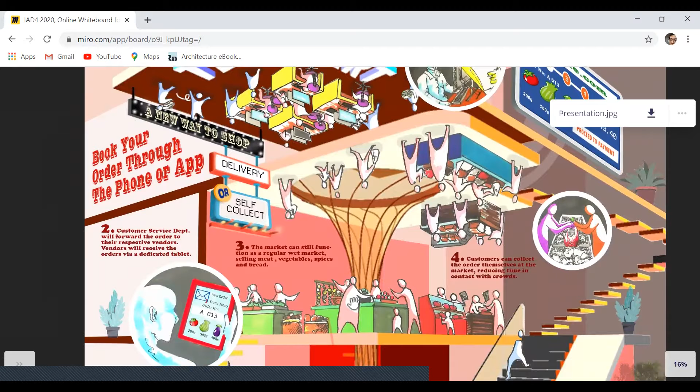This is where the Telemart comes in. The traditional wet market still operates as usual on the ground floor, but on the first floor, we have a dedicated administration office, which receives orders through telephone and online from customers, and those orders are vetted through the traditional wet market from a dedicated device.

The orders are packaged and processed and sent to the delivery area where they are quality checked before being sent to customers. Customers who receive these orders by delivery can completely avoid crowds but are unable to choose their goods.

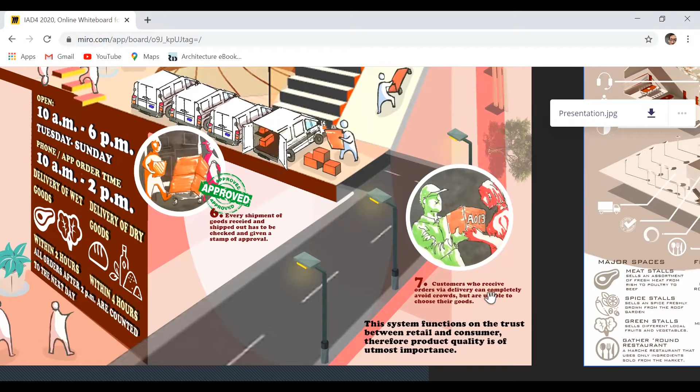This system functions based on the trust between retail and consumer, and therefore the quality of the product based on trust is of utmost importance, which I highly prioritize during the design process of the Conduit. So let's go to the Conduit.

Let's start with Rekascape Cyberjaya. It has a relatively high temperature, and the original design is relatively geometric, made of mostly steel, with speed of construction as a priority.

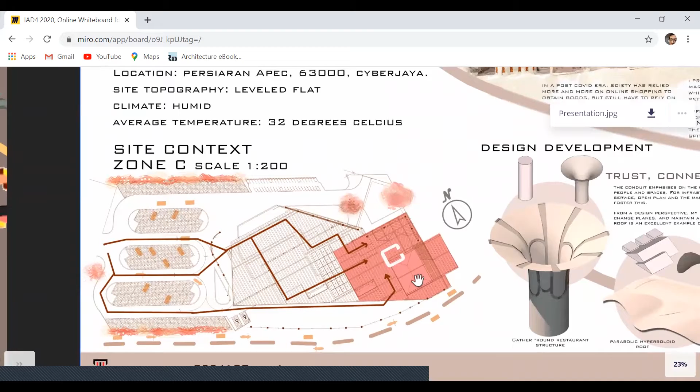I chose Zone C because I needed the parking area to facilitate my delivery service.

Let's talk about design development for a bit. I chose trust, connectivity, and versatility as my three design priorities. Therefore we have fluid shapes, open plans, relatively few walls, and relatively few doors.

Let's talk about spatial programming. We have the fruits and vegetables section, and the quality control office here, connected directly to the parking area.

Because a lot of technology is used here, since all the orders are vetted through a dedicated device, we need a directory and a tech support counter here.

Connecting all of it is a marché restaurant, which only uses ingredients sold at the stalls on the Conduit. Customers come to the Conduit, buy food at the marché restaurant, and from there start building trust and reliability based on the goods sold, and therefore build confidence and start using the online delivery service.

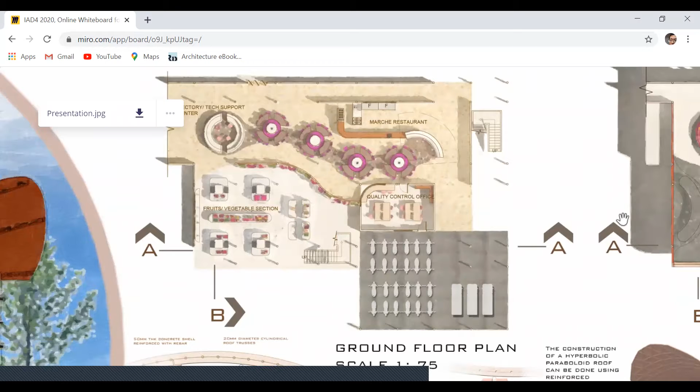So this is the ground floor. On the first floor, we have the spice stalls, the meat stalls, and the administration office, the place where orders are received via phone calls or website.

I think this is a good chance to talk about the hyperbolic paraboloid roof. I took the huge liberty to directly change the roof, and the reason for that is because I needed a design that reflects the values trying to be promoted by the Conduit. The original design of the roof is relatively geometric and rigid, and split up into multiple sections.

I thought it didn't really reflect what I was trying to do with the Conduit. So I chose a hyperbolic paraboloid structure, which is basically a potato chip shape. There's a reason why potato chips use this structure: it's a doubly ruled surface.

And every point found on this plane is connected with two different lines rotated at different angles. And so what that means is that despite this being a curved structure, it can be constructed using only straight lines, meaning engineering is quite feasible.

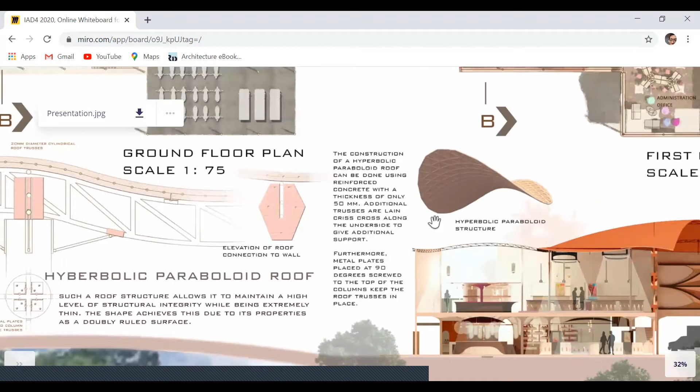Also, a main advantage of using this type of curved structure is that it has a high structural integrity despite it being relatively thin. So for 50 millimeters worth of concrete shell, reinforced with rebar and iron trusses running crisscross along the underside, should support this structure. And as you can see, the roof runs along the entire structure. It's one solid piece.

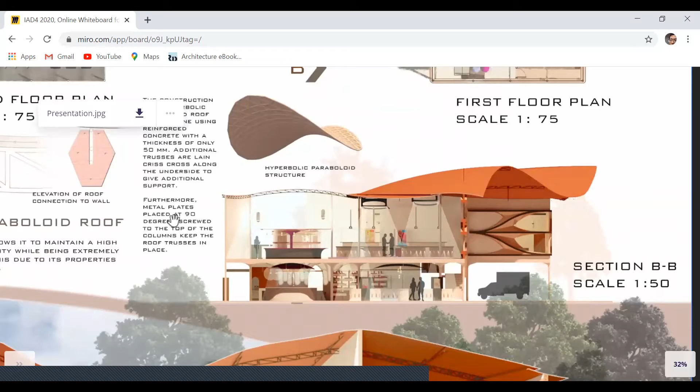So this is my section. This here is the main market area. This is the administration office. And this here is the quality control and delivery service.

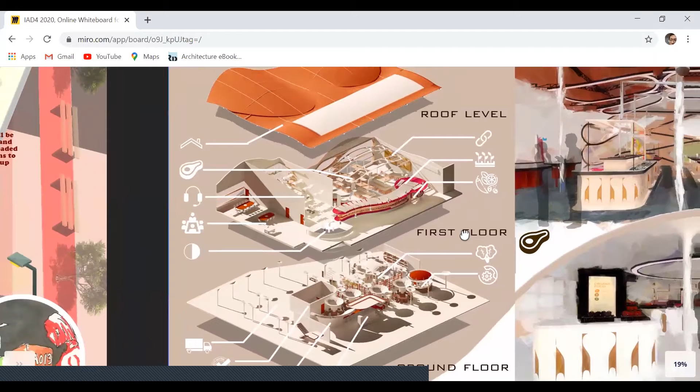This is my exploded axonometric, where you can see how everything fits together. As you can see, there are relatively few walls, relatively few doors. You can easily walk between spaces.

This is the meat stalls on the first floor. As you can see here, there is air ventilation to prevent odor.

And here's the spice stall. And also on the roof of the spice stall, it also doubles as a hydroponic garden. So all of the spices sold in the spice stall are grown on the roof here. And that's why there's a skylight.

So this is the vegetable stalls and the marché restaurant on the ground floor.

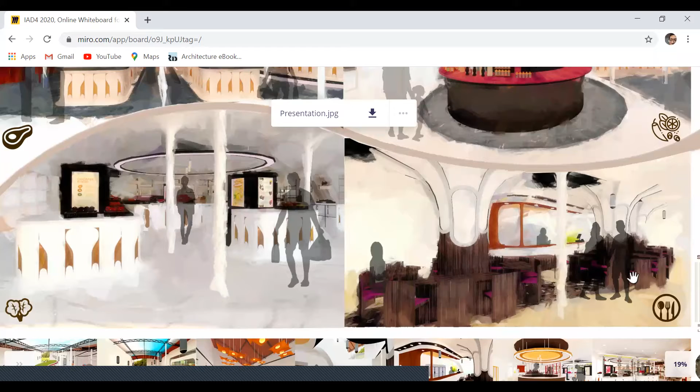So lastly, let's talk about the modular stall. For the modular stall, I emphasize versatility. Every component of the modular stall can be taken apart and put back in without changing the main stall. So for example, if you damage the main wall panel, you can take it away and replace it with a new one without having to take away the entire stall.

So the weakness of this stall is that it doesn't have any wheels. So to counteract that, there are grooves on the side to make hand carrying all of the components very easy.

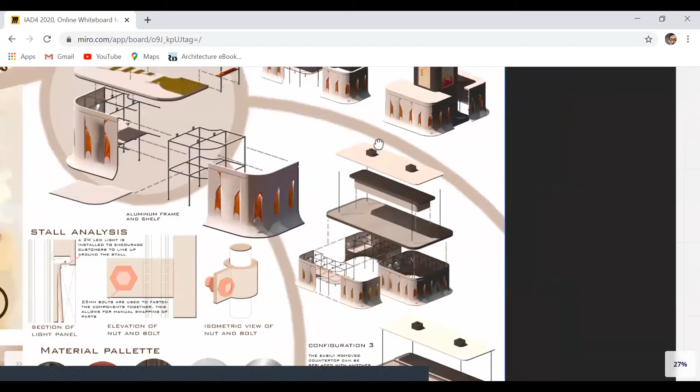And because of the high versatility, there are many different configurations. For example, here, this is the configuration that I use for the vegetable and fruit stalls, which is two stalls sandwiching an advertising panel. And this here is the configuration that I use for the meat stalls, which is basically four stalls with a custom countertop and a custom roof.

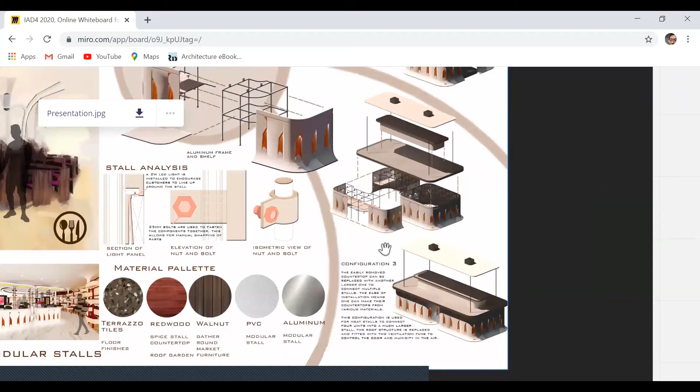So what I'm trying to say here is that due to this high level of versatility, you can easily handmade your own tabletops and countertops to arrange this modular stall in any way or any configuration that you like, which I think is the biggest strength of this type of modular stall.

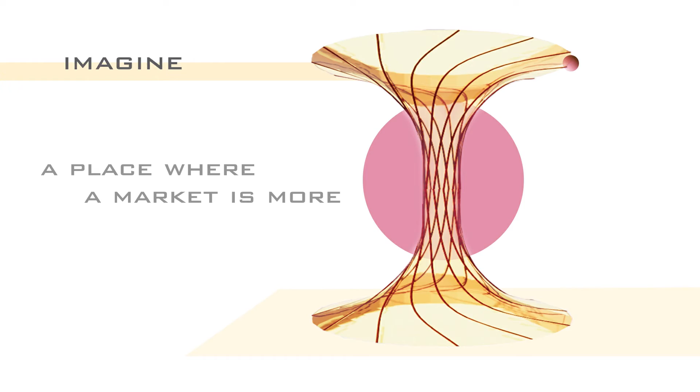Imagine a place where a market is more than a market. Where connectivity, trust, and versatility are design priorities. And to connect more than just spaces.

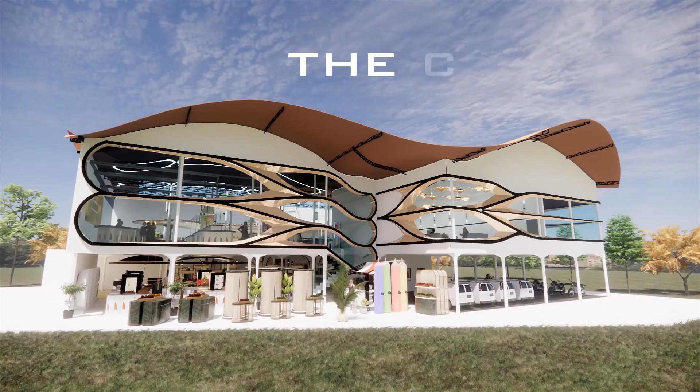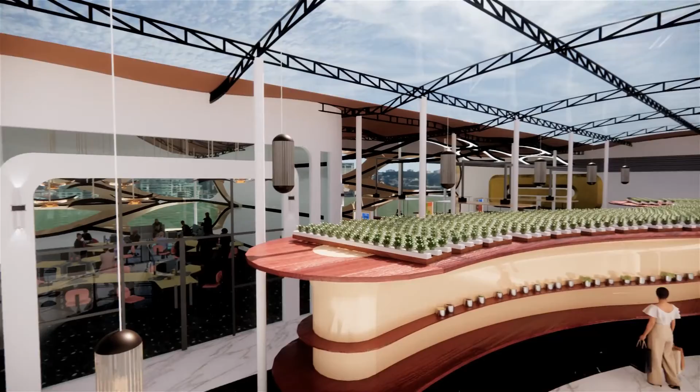The conduit is a combination of a wet market, which operates normally on the ground and first floors, and a dedicated delivery service, whose office is on the first floor.

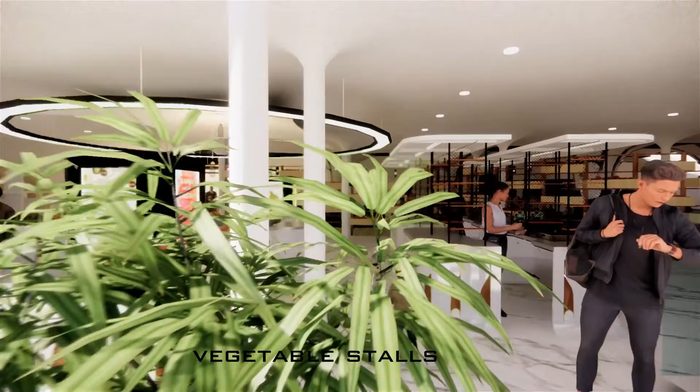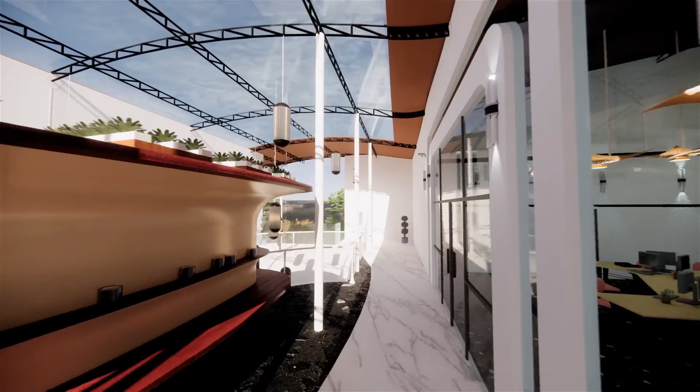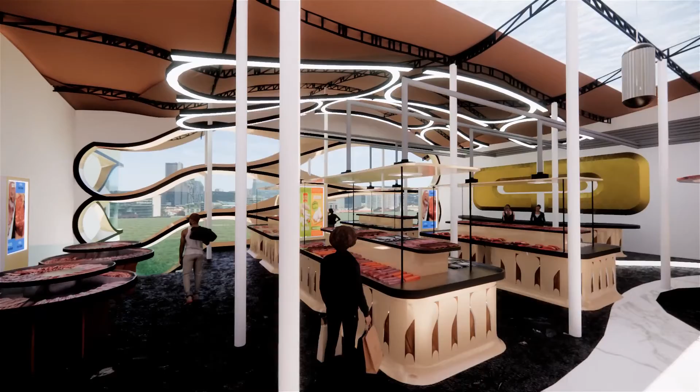Customers are allowed to shop at the wet market as usual, with a large variety of stalls, such as the vegetable stalls, spice stalls, and meat stalls.

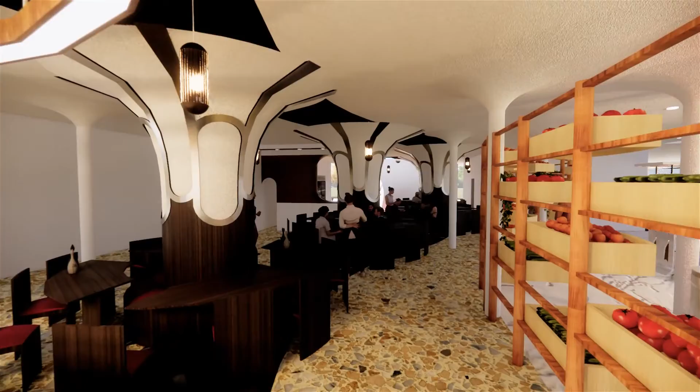All stalls are connected by a marché restaurant that uses ingredients only sold in the wet market.

Once customers start to trust the conduit's products, they can start to book their orders via phone or app.

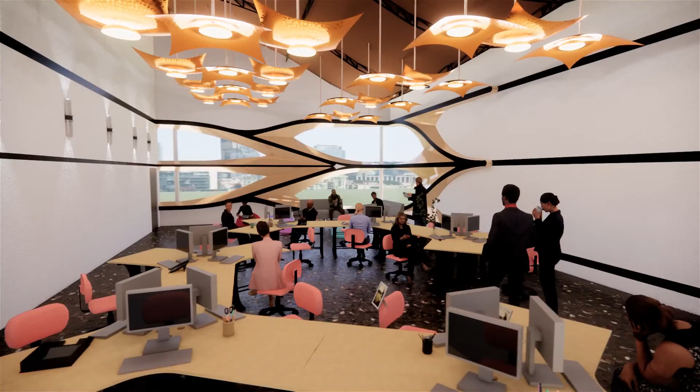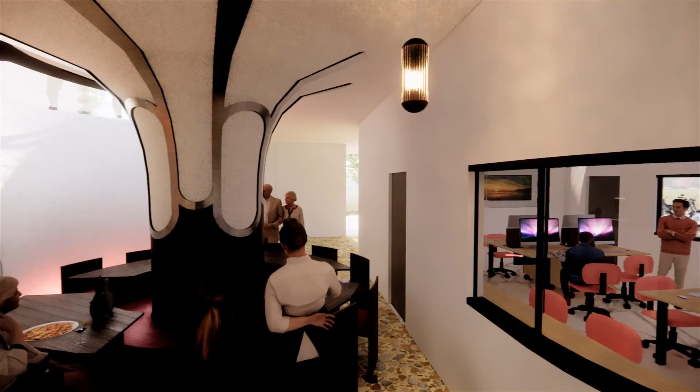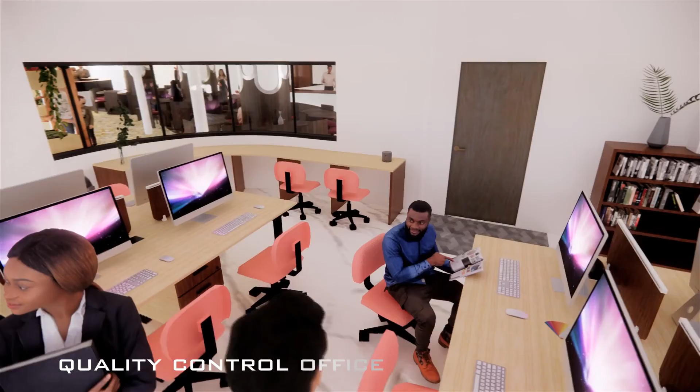The orders are received by the Delivery Administration Office before being vetted to stall owners via local area network. The orders are packaged before being sent for quality checking, and finally shipped to customers at a pickup address.